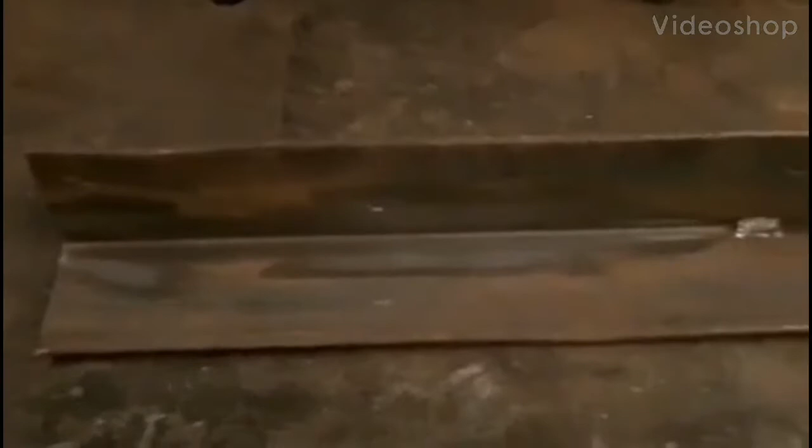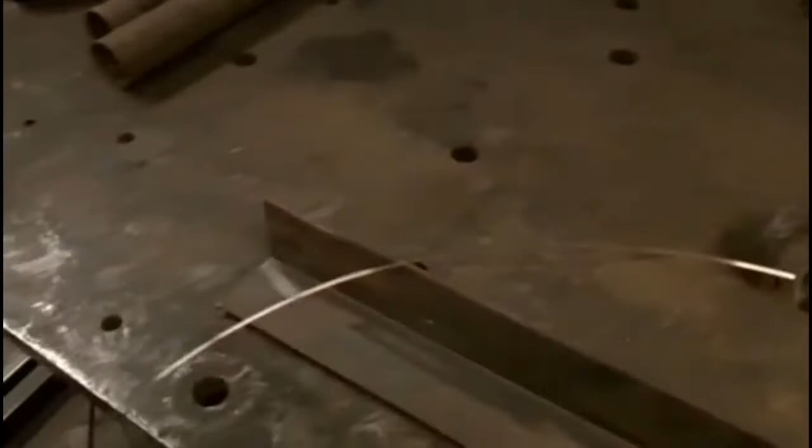We're going to demonstrate how easy it is to use a MIG welder. The way a MIG welder works is it pushes the wire out of a liner. It's controlled by a simple switch inside the machine. You pull this trigger and it basically feeds out a wire and opens the solenoid that allows the gas to come out. The gas is for shielding and protects the weld.

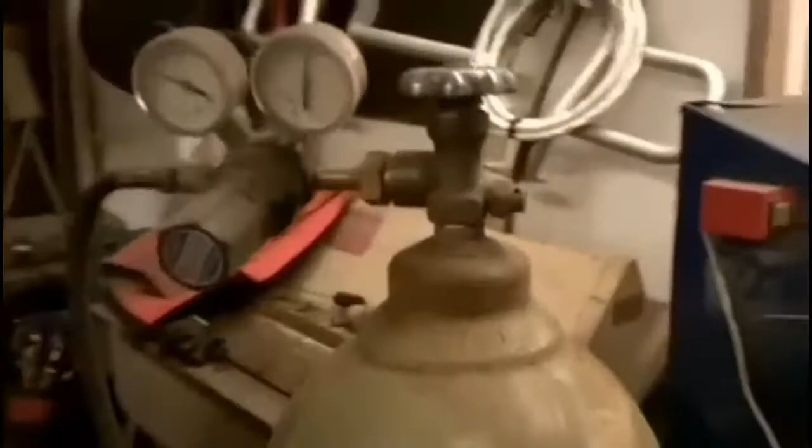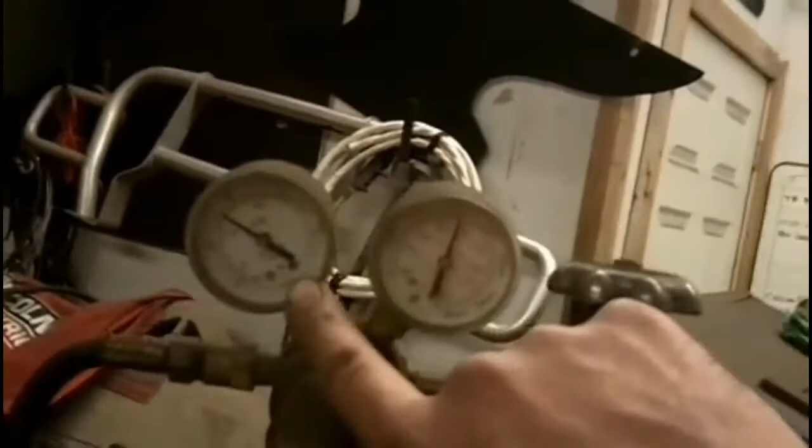Here's the shielding gas. You'll notice the regulator is set for between 20 and 30 CFH. That's your high pressure, and this is your low pressure. This is basically a kind of a flow meter. This is not really a flow meter, but this is showing you the flow rate approximately. A proper flow meter has a ball bearing that is very accurate about showing you the flow of gas.

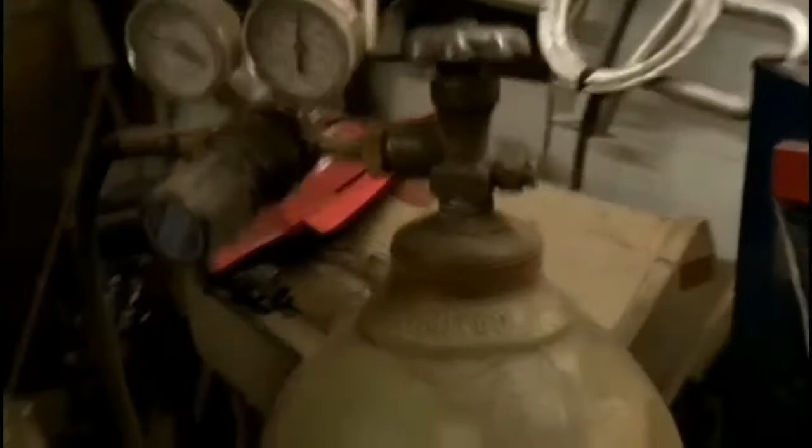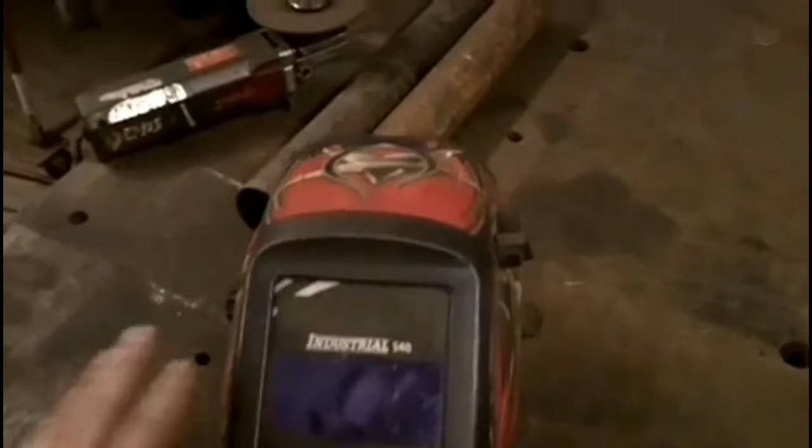Anyway, let's get some welding going on here. Just a quick thing about helmets. If you're getting into welding, get yourself a real good automatic helmet. Do not buy a cheap ass welding helmet. You're only throwing money away.

Because pretty much all of them now have a sensitivity dial. That's there for if you're working out in the sunlight or in the dark. You can change it so it triggers at the right times. Maybe you have a welder working right beside you and your helmet keeps switching when you don't want it to. That's what this is for.

This machine goes from shade 7 up to 14. Shade 10 is sort of the average for like burning 1/8 rods or welding 1/4 inch steel. If you're welding some thin sheet metal, you put her down to 7 or 8, something like that. And if you're gouging or something, you might put her up to 13. You're doing some aluminum TIG welding at 300 amps, you might put it up to 14 or more, because that shit is bright.

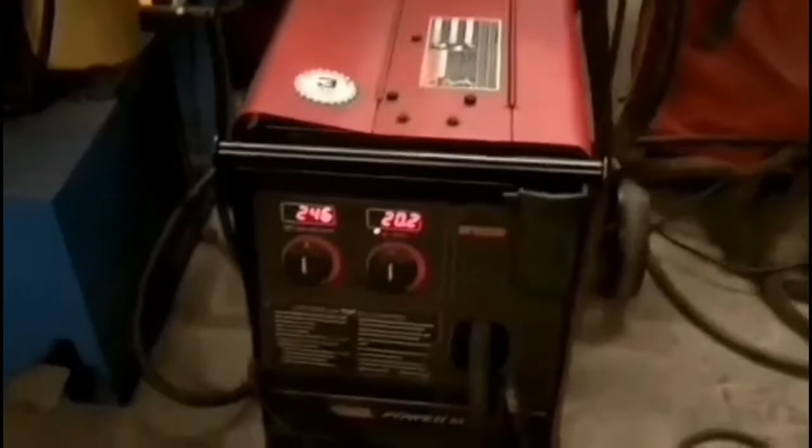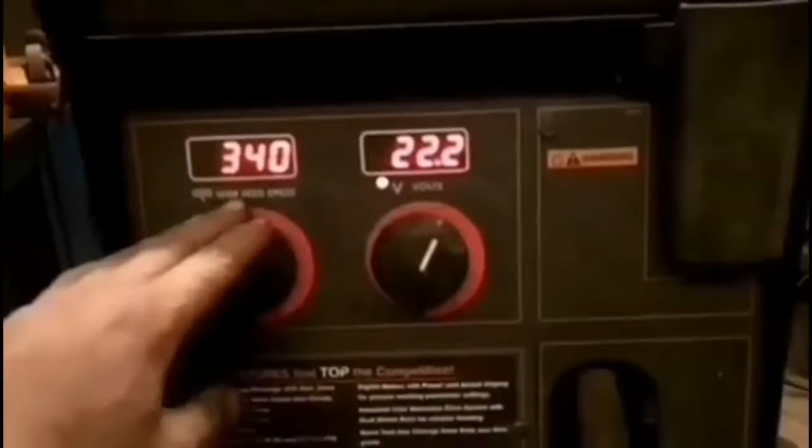All right, we're going to do a quick pass with this machine, and then we'll start to get into how to make changes with your settings. I have not changed any settings on this machine from when I fiddled with it. I've got a piece of 3/16 angle iron right here. I'm just going to weld into the middle of that, and I've got my machine set at 20.2 and 246. The numbers really don't mean a lot. It's more or less a feel thing. This is your heat, this is your fill.

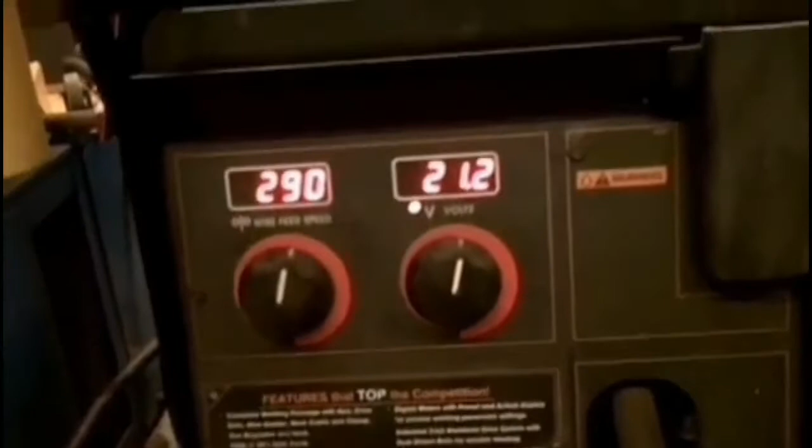If you're having a problem filling the gap but it's burning good, turn this up. If you're getting a piled up weld, turn this down. If it's too hot and it keeps melting through, turn this back a bit. If when you did that, it starts pushing back the wire, turn this down along with it. The numbers, again, you can put pieces of tape over that. They don't mean shit. It's just sort of a reference.

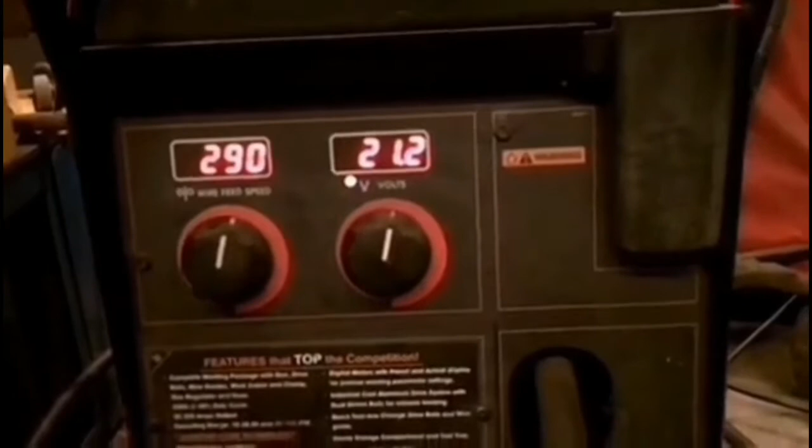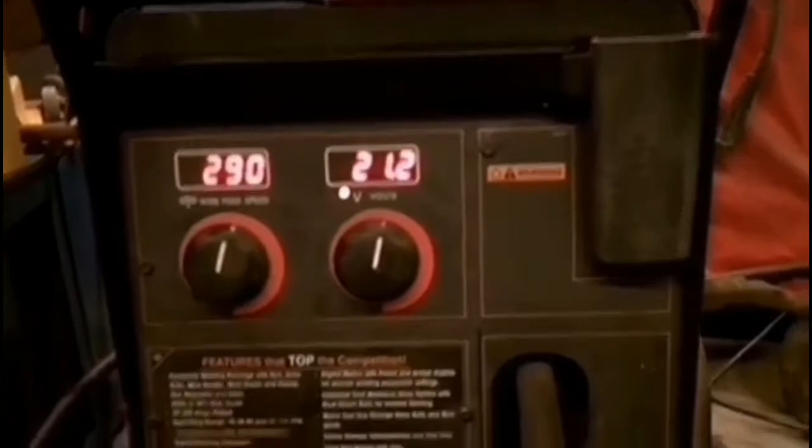The reality is you change these dials as you need to change them. Do not be afraid to change dials between every single weld. There's people who think that they can set this up and it should be doing a good job all day long, even though they're changing positions and welding up and overhead and down. The reality is you are not a good welder if you're not changing these constantly. Making a simple minor change like that just to fine-tune a little weld so you can do a better job, that differentiates a quality welder from a hack. So don't be afraid to change your dials.

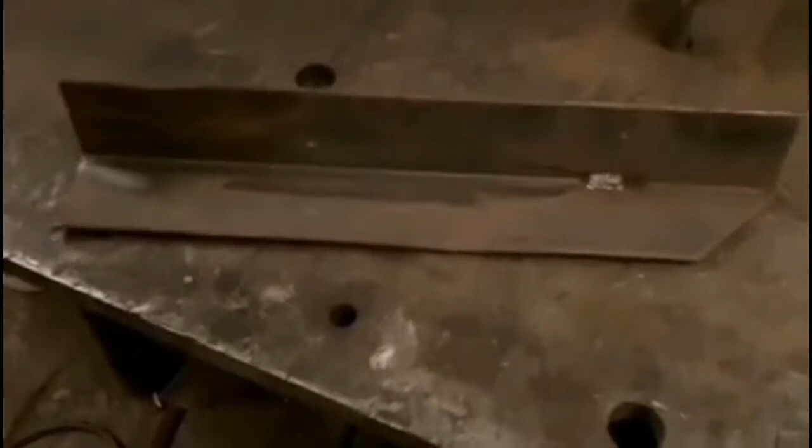So I'm just going to go with those numbers. This weld may suck, but what it's going to show you is if the weld isn't working out, then we're going to make changes to make it work out. And I'm going to show you how to make those changes. So I'm just going to quickly snip this wire off. Never burn it off; some guys will put that gun under the table and burn that off. Don't do that shit. Pros don't do that. So, do a little weld here, see what happens.

Okay, it's kind of hard to hold the camera and do this at the same time, but that weld came out more or less perfect. I can't really see too many problems except a little bit of a spatter problem. I think my wire feed was just slightly low. And what happens is you get a little bit of globular action happening there. So the voltage seemed to be pretty good. So I'm just going to make a minor change, not much of one. You see how subtle that was. And we'll try it again.

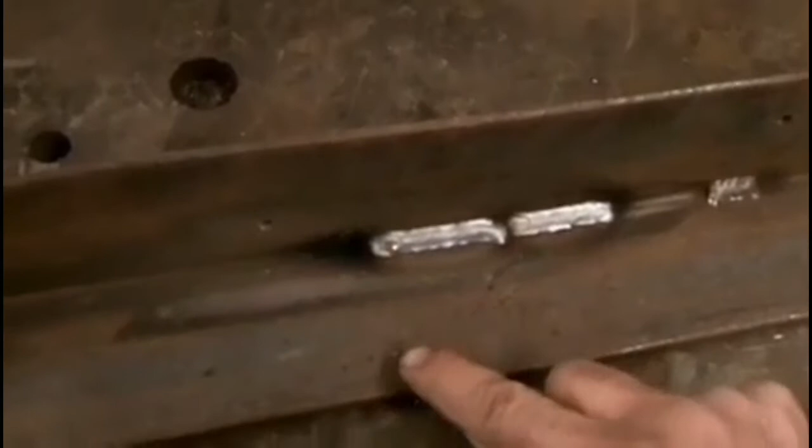Now you see how that sounded a little bit nicer? Didn't really change the appearance of the weld much, but it eliminated my spatter problem. The balls of spatter were smaller. That'll make them less likely to bond and therefore easier to clean up with a wire wheel or just by knocking them off. They're likely not welded on. I know you can't see that with the camera, but there's a couple here from the first weld that are almost a millimeter across, and they're definitely welded on. Well, not definitely welded on, but you can probably knock them off.

But I'm going to show you something else. This is sort of your typical short circuit transfer style welding. When you hear the sort of machine gun sound there, the more you dial that in, the more that sound is smooth. It's not the end all be all of how a weld should go, because I've seen people where the only way they knew how to dial in the machine was by the sound. Sound ain't important. The end result is important. What this fucking weld looks like is important.

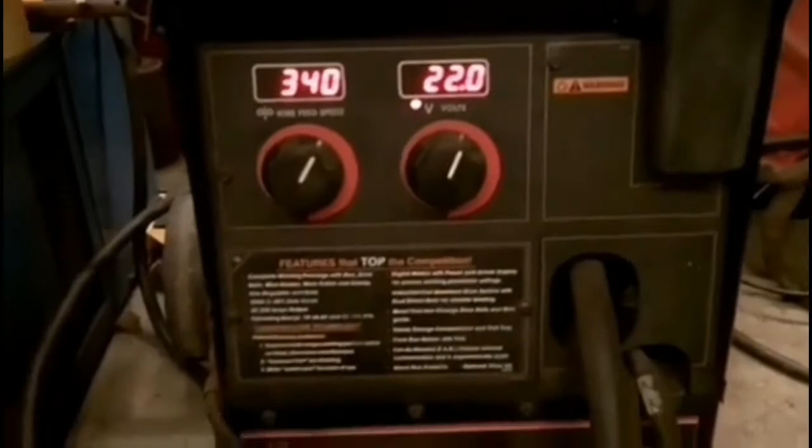And is it fused? Because you can do the most beautiful weld in the world, but if this piece is not stuck to this piece, it don't mean shit. It ain't a weld. It's not the weld itself, the end result is the weld. So I'm going to dial this up, bring this up a notch, and show you what spray arc seems like.

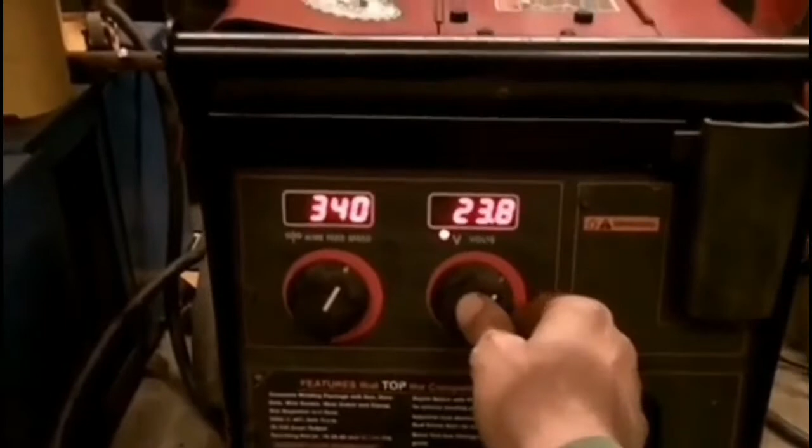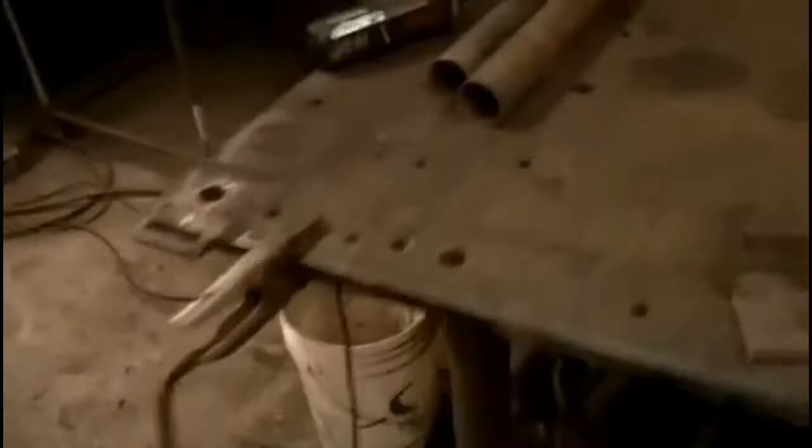The wire's a little small for spray arc, but we're going to blast these volts up to like 27 volts and about 480, 470. When you're doing spray arc, this tends to be a little bit of a lower ratio than this. They won't be lined up. We're just going to take it from there. Like I said, just set your numbers and don't worry about it. Do a practice run and test it out and see if it is right. If it's not right, make some changes.

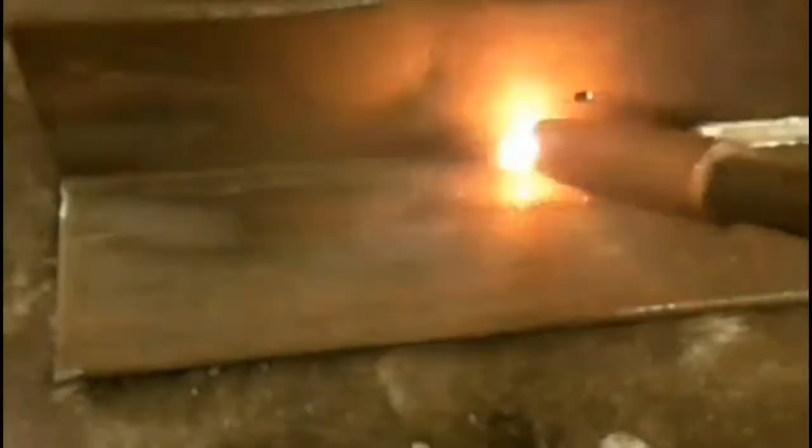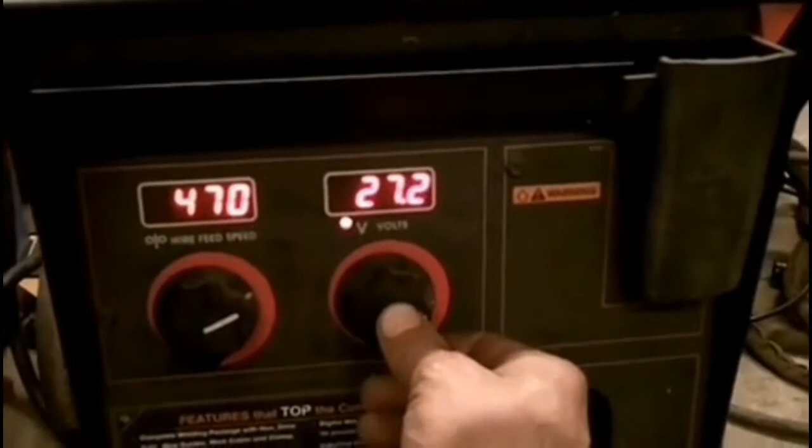Okay, that was getting close to being a spray arc weld. As it was warming up at the end there, it was achieving the visual results of a spray arc weld, which is a high degree of wetting and a herringbone pattern. At the beginning of the weld is quite a round profile, and at the end is a V-shaped profile with a line going down the center. To achieve the results we're after, we'll see if the volts go up a little more. Maybe we'll put the wire down just slightly and try it again. Try right here.

So this is the main benefit of a spray arc weld. It has a beautiful pattern. It's a very flat weld. It wets in perfectly. The downside is occasionally it's so hot it creates undercut at the top of the weld. In this case it didn't, because I didn't quite have it that hot, but if you tune it up too much, you'll get that problem. It's almost impossible to do spray arc in any other position than flat. Overhead I've seen it done, but it's not really practical. Deposit rates are too high.

The main benefit is that there is almost no cleanup. There's very little, if any, spatter. Super clean looking, super fast, super hot, digs deep. It's a great weld for heavy material; if you're going to weld something real heavy, that's the way you want to go. So you see the difference as the heat went up, right? That was much colder, a little hotter, a little hotter, a little hotter. So anyway.

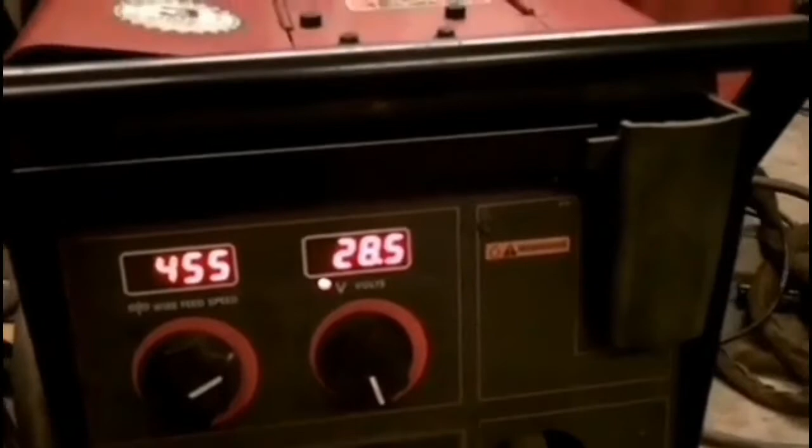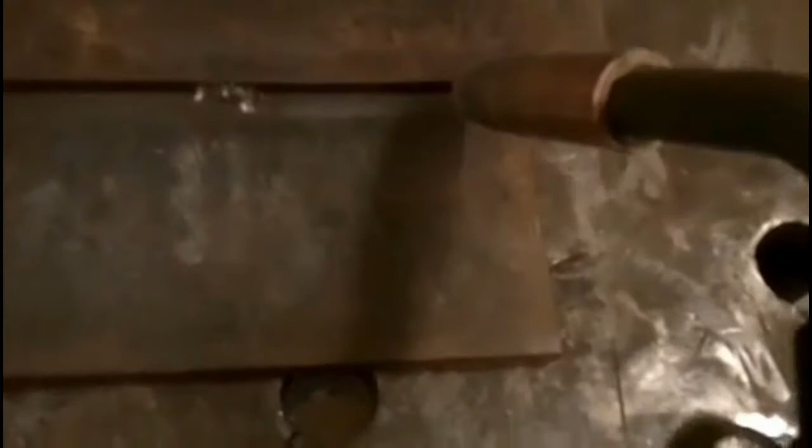So anyway, this is a piece of 1/4 inch and this is a piece of 1/2 inch, which makes it a little funny, but we're gonna tune these volts up even more. Oh, that's as far as the machine goes, 28.5. We'll just leave it at 455, and we'll do a real heavy spray arc. Ideally, it would be almost a silent spray sound, so we'll see how it goes.

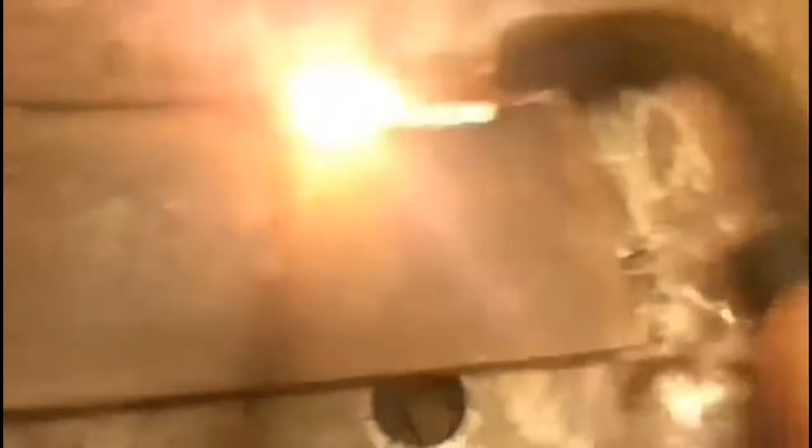Okay, that was a real hot weld. I know some people will critique my straightness there, but you try holding the camera and welding with one hand at the same time. It's not really that easy to do, but I think I did okay.

Again, I'm not getting my true spray happening, but that's because I'm running the 035 wire. If I was burning 045, it'd do a much better job, but it's not bad for what it is. Anyway, that's the basics of welding a fairly thick material with MIG welding.

Just thought I'd go over what a weld ought to look like, because if you're welding, let's say, this piece to this piece in thin material, what you need to do is make sure that when you weld this, it's hot enough to penetrate down into the weld joint. So if it's 1/8 thick, you don't bevel anything under 1/4 inch really. You just make sure you got a good enough gap.

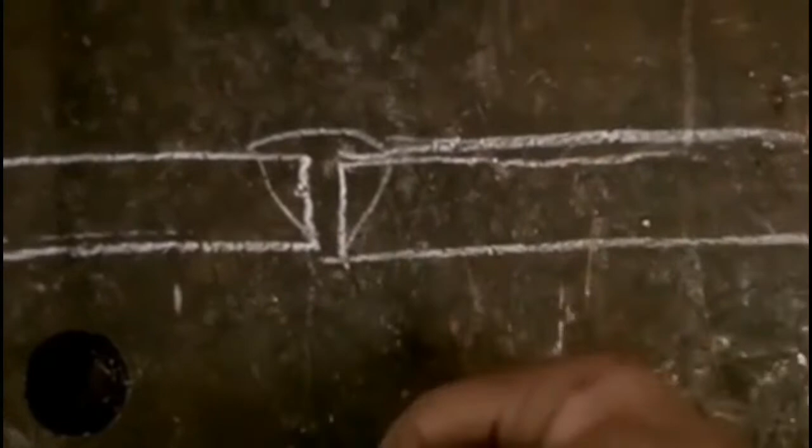Even 1/4 inch you can do it if you're good, but make sure you got the gap just right to get that one weld down in there, and you won't see much at the bottom, just a little bit there, but it's not truly a good weld unless it goes right through. It's really only half of a weld if it comes up a little bit short under there, in which case ideally you run a pass on the back just to be on the safe side.

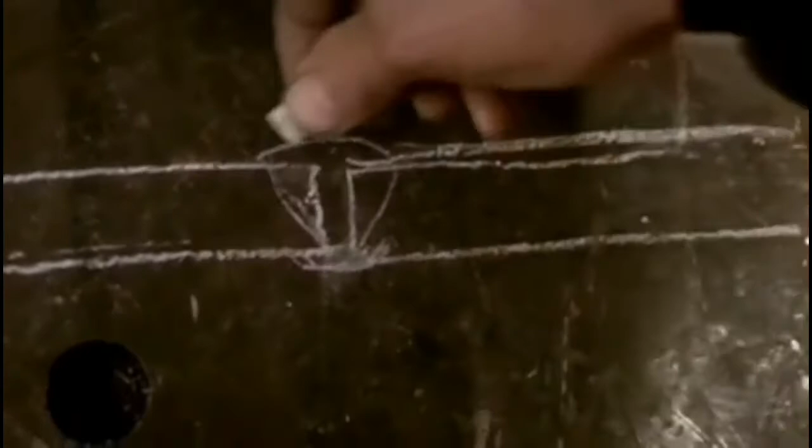This is called reinforcement, and this is called your base metal. This is your weld, obviously. When you grind a weld off, you're actually making this whole area weaker than the original. If you leave that weld, as long as it's got a great looking profile, you really should leave the weld.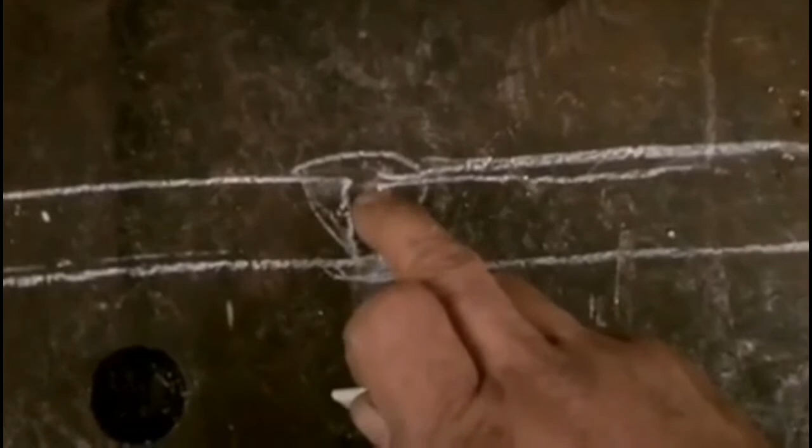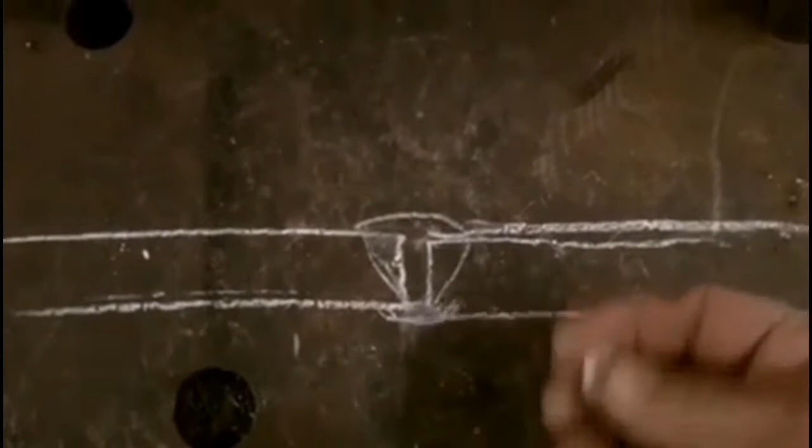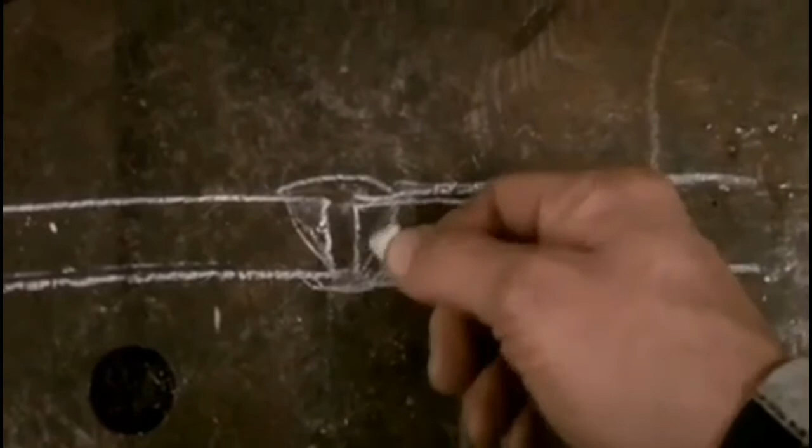That's why you quite often see welds where people don't clean them up, because if you're an amateur, you think, well, I should grind all that stuff down and make it real pretty. Well, you're doing yourself a disservice, because you're making the overall joint a little too weak. It's close to the original, but it's not 100% as strong, because you have what's called a heat affected zone all in here, where the metal has been affected by the heat. And that's pretty obvious, I guess.

So this is kind of like insurance, this extra bit of metal. So try to do a really pretty weld, and then you can leave it there and you can be proud of your weld.

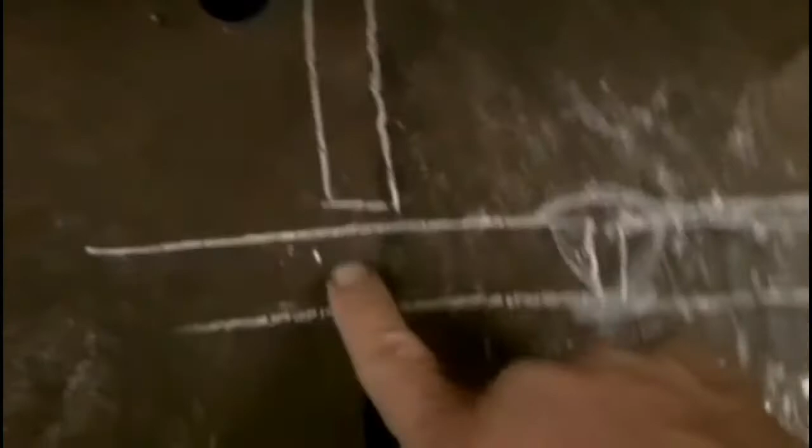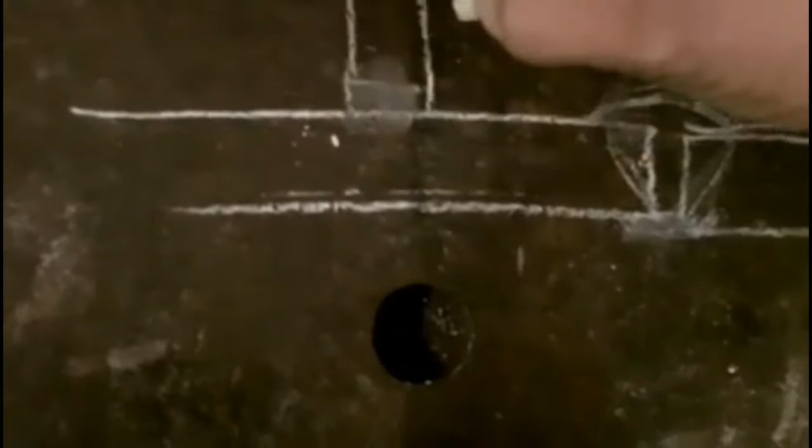So, a weld profile for a fillet joint, say you ran another piece in here. Now, in small material, it's not a problem to just butt that right up. There wouldn't be a gap. You just bang it right up against it, and you're going to do a weld here, and you're going to do a weld here. I'm just going to exaggerate what the weld should look like so you can see it a little clearer, but it wouldn't be this big. But the profile, like a cross-section look, should be like this.

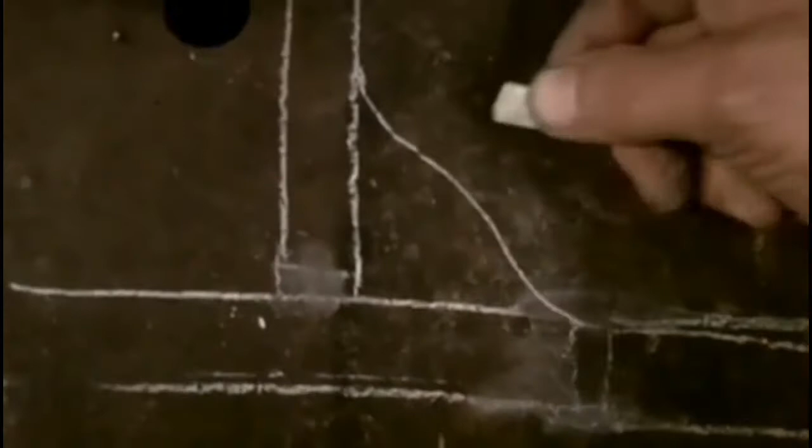Okay. It should be slightly humped up in the middle, and this is what they call wetting in, which means it's a smooth transition into the base metal. What's called undercut is when you've ran this a little too hot and it melted that away. If you've done a bit of welding as an amateur, you'll understand what undercut is. That's where you ran it pretty hot and you didn't have the angle of the gun quite right, or there's a variety of different reasons for getting undercut.

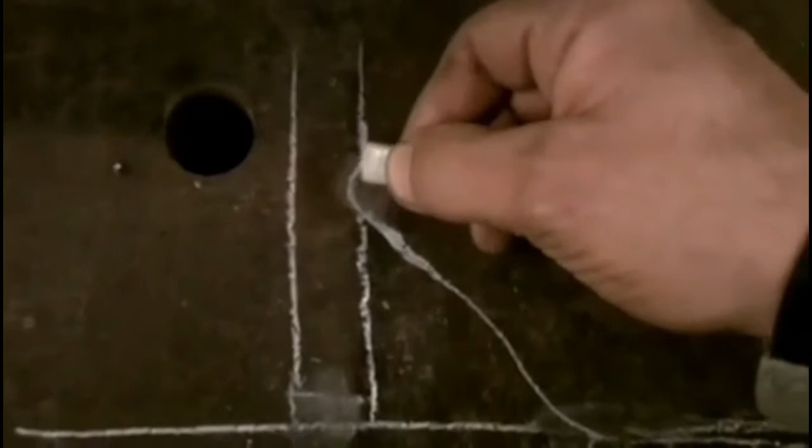But undercut is a serious problem, because let's just say this was 1/4 inch and you had a decent undercut there. Well, you just turned that 1/4 inch into 3/16. So what was the point of building the whole thing out of 1/4 inch anyway, because it's really only going to be as strong as that weakest point. So you really want to try to control undercut.

If you get undercut, the simplest way to fix it is to run another little quick pass in there. It's not going to bother anybody. You're kind of doing a little bit too much work there, but it's better than having that weak spot.

So don't do it. Set your machine right, and you know, practice. What I'm going to do right now is I'm going to show you a little bit of welding on some 1/8 square tubing, just because that was the first thing I grabbed, a piece of scrap. I turn my machine down to where that would be. Ideally, let's just put her around 19, just as a starting point.

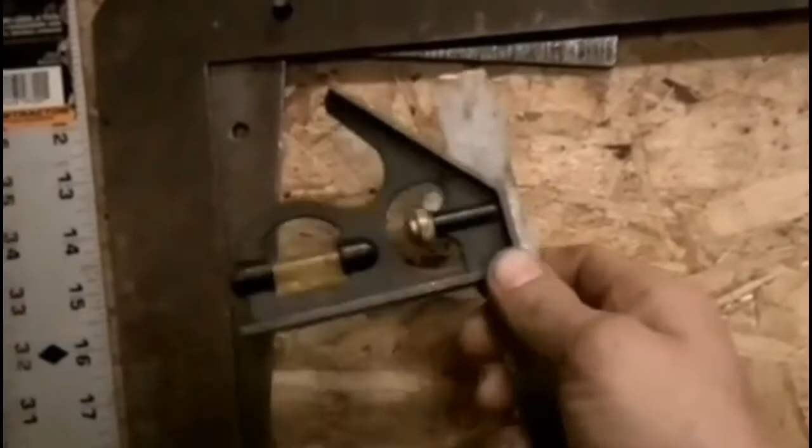What I've got here is 2 pieces of 2" by 1/8 wall square tube. So let's see, if you were actually building something and you're trying to do a nice joint like that, a good square to use, I mean, you can use pretty much any kind of square. Speed squares aren't bad. Any kind of framing square is okay. They tend to be kind of big, so big square, big project. But one thing you want to do is nip the corner off carefully. Don't add a bunch of heat to it, because you may throw your square out a little bit.

But this is for small stuff, tubing and stuff. This is sort of the general shop square that lots of people use. Tri-square is what it's called. Works good for lots of tubing and stuff, because you can put it up against the back here. Fits in smaller spaces than a speed square or a framing square. And it's used for probably 90% of the squaring work, except for larger things, larger square. So we get back to the 2" square tube that we had. Just gonna make like a T-joint.

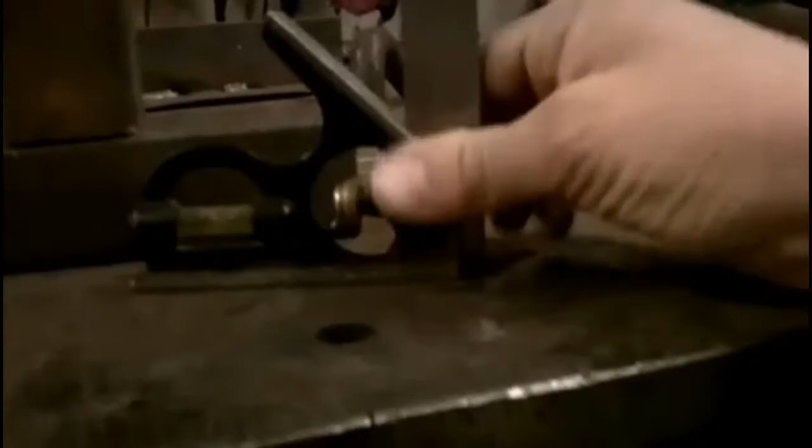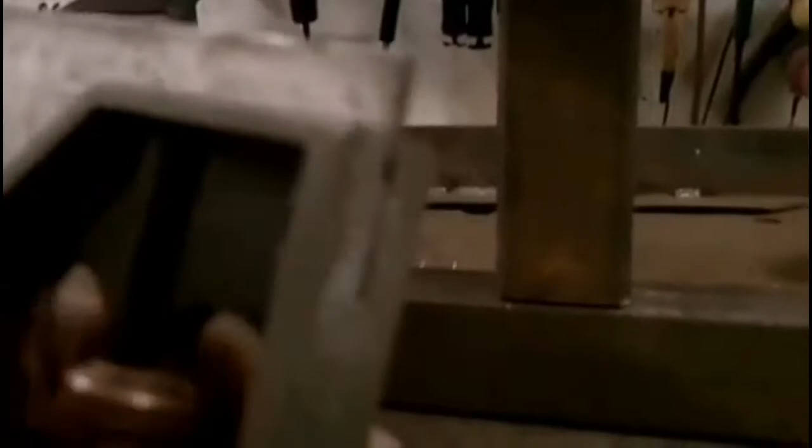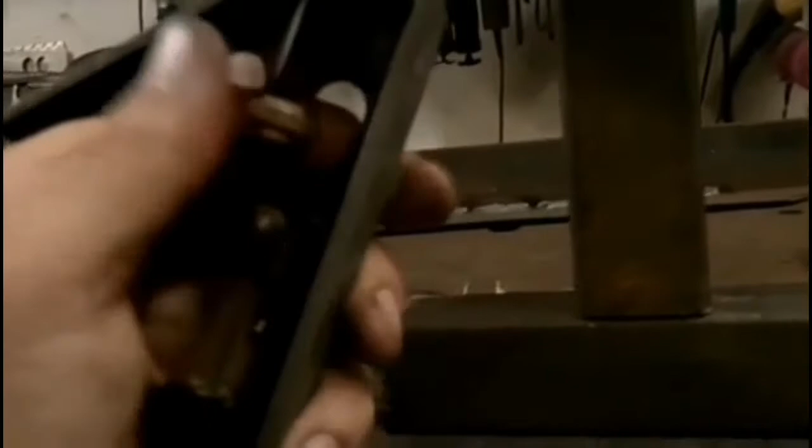So I've got that sitting there, and what I'm gonna do is I'm gonna take my tri-square, I'm gonna loosen that up, I'm gonna drop that down to the bottom. And you always want to push that bar, the ruler, back just a tiny bit beyond the surface there, just maybe a 1/16. And with a tri-square, never over tighten it. When you over tighten them, they go out of square. If you don't believe me, check it out. Just crank on them sometime and see what happens to your square. So it should just be just snug enough.

Don't cheap out on a tri-square. Make sure it's basically like a cast. I think this is a cast aluminum maybe. Don't buy a plastic one. They're not worth shit. As soon as you start doing any welding around them, they're just screwed. They'll sit on something hot and melt away. So I'm just going to put this tri-square up against that and check for square. That thing is absolutely perfectly square right now.

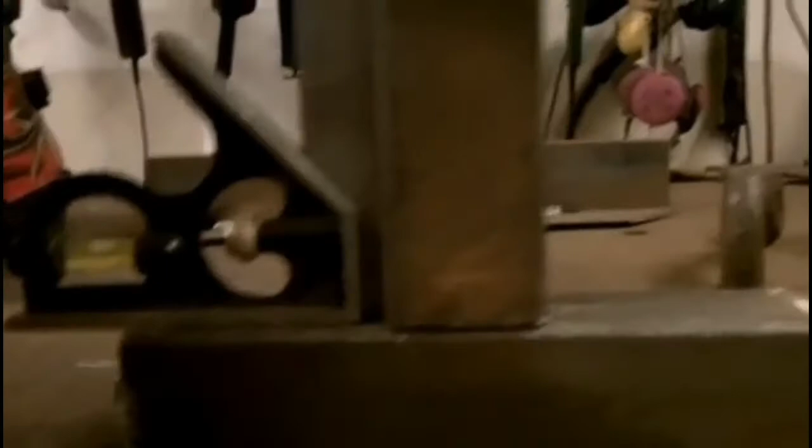Likely because this end piece was cut in my, I have one of those dry cutter saws. They're great. They cut really nice with a brand new blade. And very square, especially if you buy a good machine. Some of the cheaper Chinese machines I've used, they're not quite as accurate as mine. Mine's a Porter Cable, but you know, you get what you pay for. Twice as much money, it's going to be twice as good, hopefully. So she's dead on square on this side, so I don't have to really worry about anything. When you put a joint together like this,

another thing, I don't recommend those triangle magnets, those red welder's magnets. They're not bad, but they quite often cause a bit of problems. You got to clean them all the time because obviously they're magnetic. They're attracting every single piece of dust and spatter in your shop, and you got to make sure there's not the slightest little dingleberry under there, because they will mess you up. You're much better off just kind of going by eye, and there are moments where I've used them and they've kind of been the third hand you don't have,

and maybe I could design one to hold this damn camera. That might be a good idea, actually. I have to work on that project.

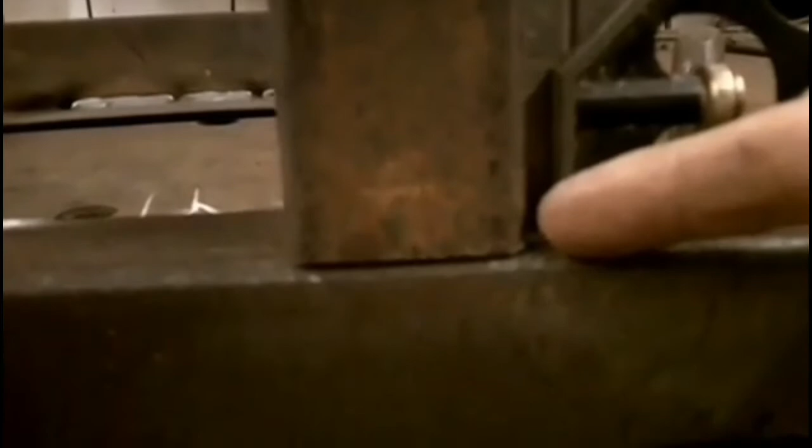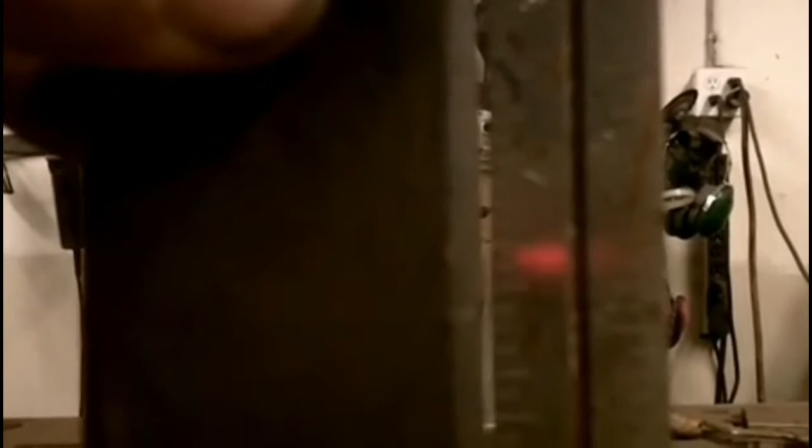So anyway, when I'm putting this stuff together, I kind of don't think about it too much. It's sort of on autopilot, but I slap my square against this here, and if it was a little out of square, like say over a foot it had maybe a 1/16 out. I guess it doesn't really matter, but if it has any out to it, if it's leaning this way, put your tack here on one corner. Never put your tack in the middle.

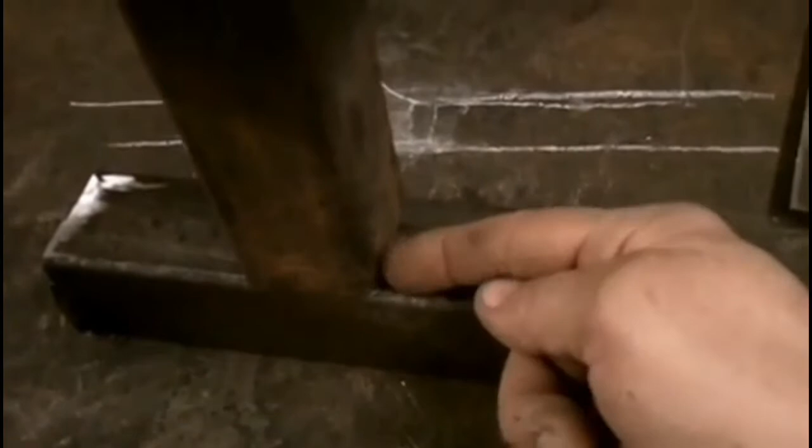Put one here and go with that one. Don't put it at the outside edge, but put it just on the inside to this side, or the other side, just depends, you know, whichever is more comfortable for you. Then what you do, likely that tack, when you put that tack there, that's gonna pull this back this way through contraction. Quite often it'll pull it right back to where you want it.

If it lines up perfectly, then you may want to push it back beyond where you were, that direction, a little bit out of square, but not nearly as much as it was before, and then put your tack on the opposite corner. And then what that does, when that one contracts, it brings it back, and 8 times out of 10, it's pretty damn close to being right on where you want it.

Then go around. If it needs to go a little more this way, do that third tack on this side first. If it needs to go that way, then do this one first, right? So, you know, you may not remember that, but that's a good trick for fabricating quickly. You can throw a joint together, a square joint, in a matter of minutes, really. Maybe even a minute, or less.

So what I'm going to do, I'm going to just show you without holding it. I'm just going to put a tack there, and we'll see what it does. See if it pulls it back out of square, which it will do. So hold on a second.

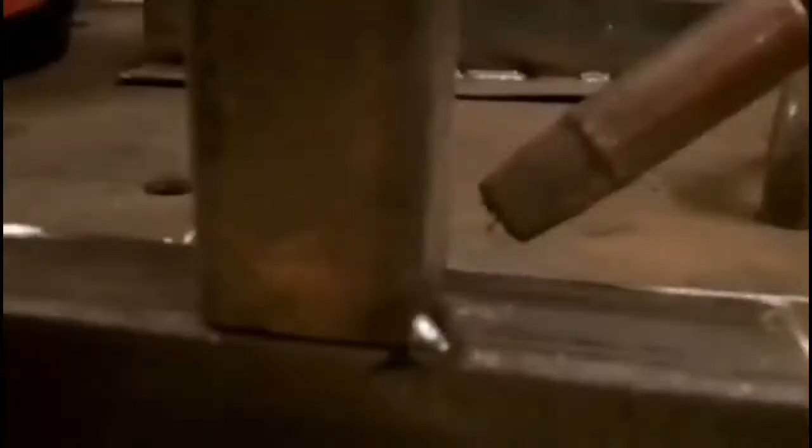What you do is put that right in 45 degrees, exactly 45 degrees, start your tack, come down a little bit with it, and then go back up beyond that a little bit, and then back to the middle again, and it'll weld. You'll see some people, when they first start doing it, they just think you hold it right in there and squeeze that trigger and wait. Well, a lot of times it'll hit the bottom a little more than the top, and it just won't be a good tack. So just rock it back and forth like that a couple times.

So we got that there. Now we're going to check this for square, and as explained earlier, it will draw. So we do have a little gap there at the bottom because it drew back a 1/16 of an inch over that 9 inches. Normally I would have held that just with my hand. When I did that tack, if I had held this with a little down pressure, it wouldn't have pulled very much. But in this case, it pulled about a 1/16.

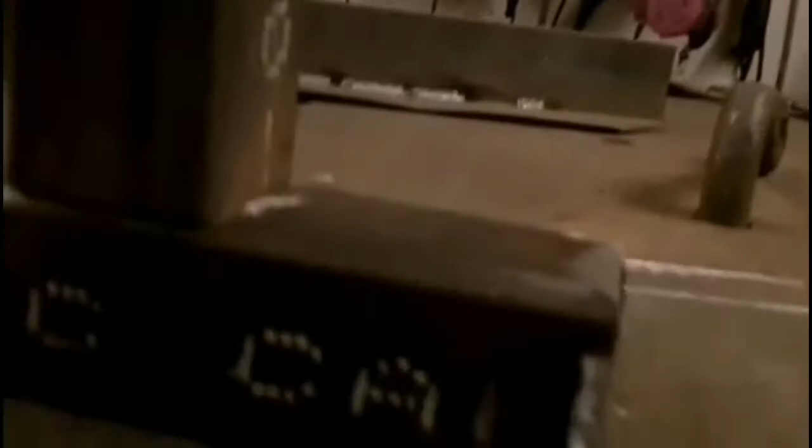So what I got to do now is when I go to the opposite corner, this corner, I'm gonna push down and back this way with my hand, and then put my other tack. So I'm gonna do that now, but I'm gonna have to set the camera down to do that because I don't have free hands. So just hang on a second. See if you can actually see this.

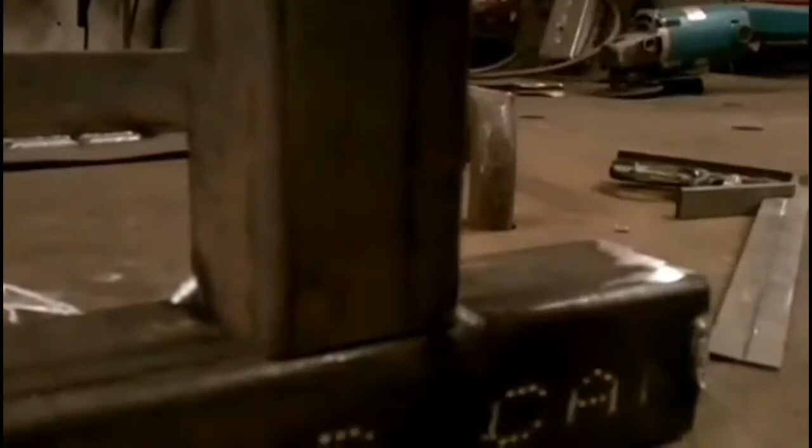Alright, I don't know if you can see that or not, I have to review the tape, but anyway, we've got a good tack there, and we'll grab our square again. She's dead on. She pulled it right back, right where you want it. Both sides are dead on square. Now, what a lot of people don't realize is you don't have to do anything else. This is good enough now. As long as these are good strong tacks, you only need those 2 tacks.

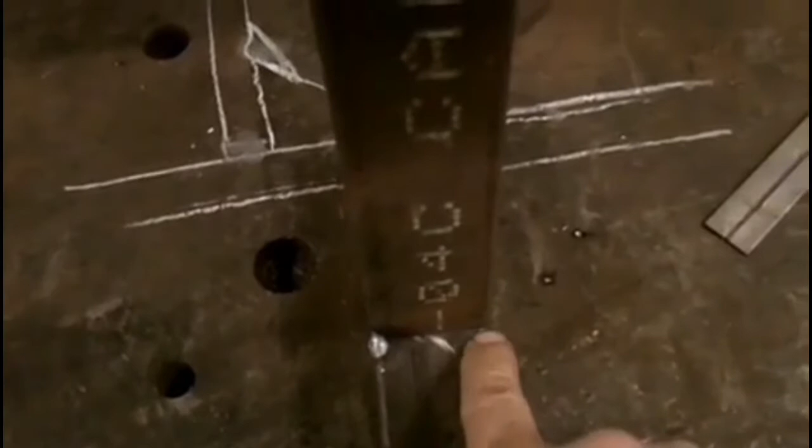Not in every case. If you want to be very, very secure about your project, then go ahead and put 4 tacks, but in some ways you're not being completely efficient. This other tack that's back here now is so strong, it really won't draw this way. So I can run this bead, then I can spin it around and run this bead.

Never start your weld on a tack. Start over here and run into that tack. It'll look cleaner and you won't have a big lump where your tack was. That's why I was saying don't put your tacks in here, because when you go to weld and you go over that tack, it's going to be a shit ass looking weld. So I'm just going to put my helmet on here and we'll weld that out. Okay, here we go.

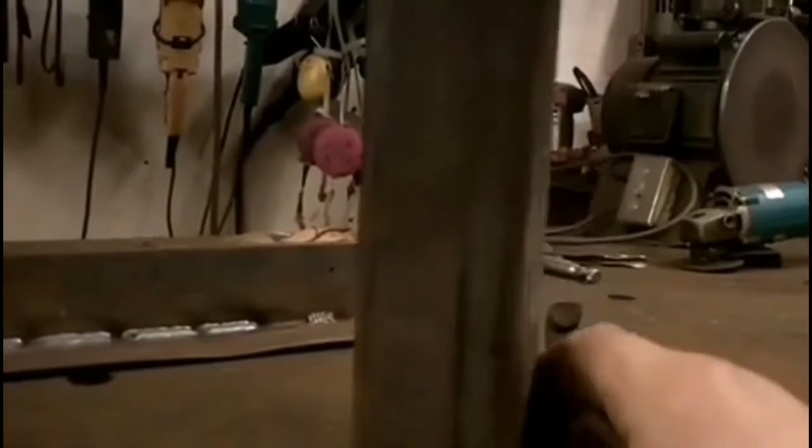Okay, so there you go. Perfect weld. Has a perfect profile, like with the hump shape in the middle that I was telling you. And we'll check the other side here for square, just to see if it drew a tiny bit. It's absolutely perfect. That weld was run, and you would think that it would draw back a little bit. On this material and this short of a weld, it won't do it if it's held by this one strong tack. That's all it takes.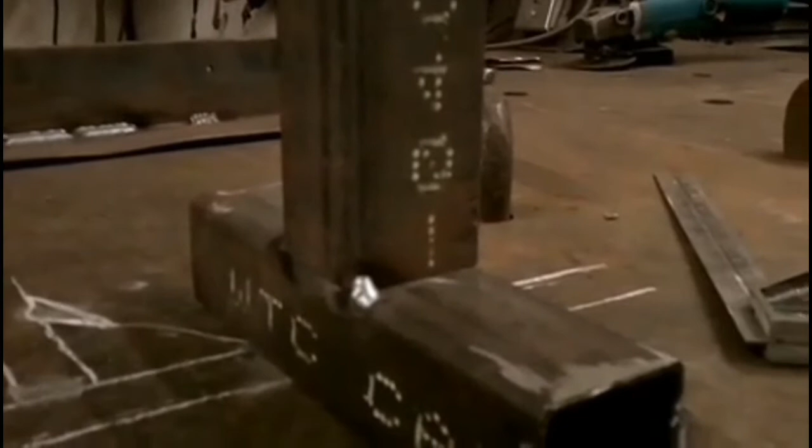Now, what I was telling you about, if you start this weld on this tack, this is under stress right now because of that other weld. If the heat hits this for a moment, it'll soften it up and then it'll draw that way. So that's why I'm saying never start your weld on a tack. Start it over, away from it. If you had 4 tacks, don't start the weld right on top of the other tack on this side. Just go in a little bit and keep the strength there.

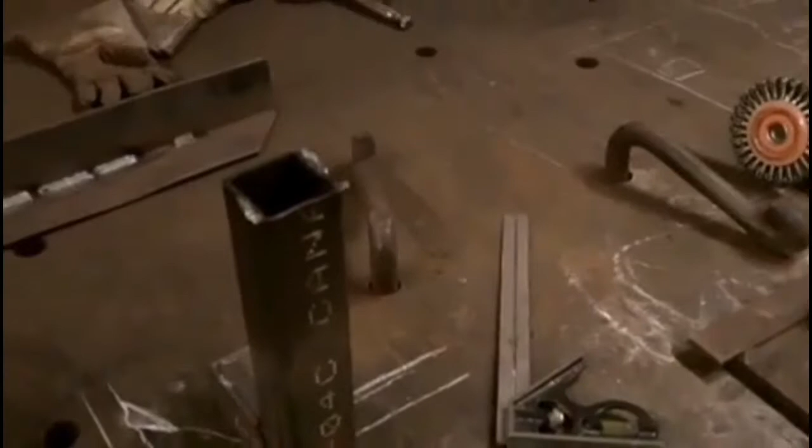So we'll just weld this other side, get it finished. Exactly the same as the other one. The numbers seem to be pretty good. It was a pretty good guess. Sometimes you get lucky, but those numbers are perfect for this material. So let's just go ahead and weld this out.

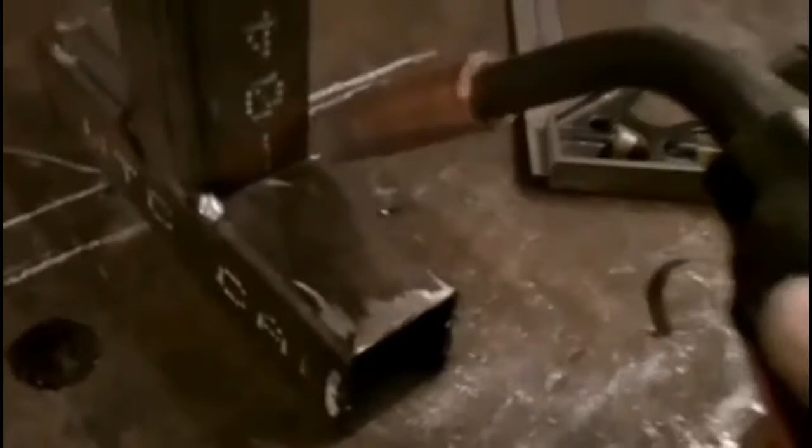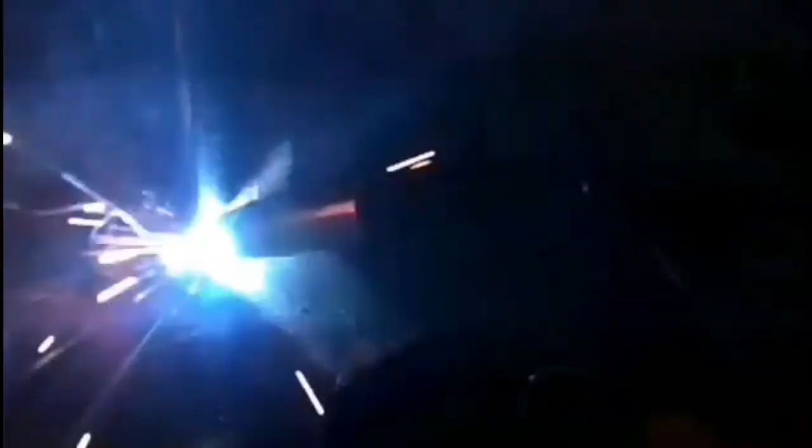It's a good habit to get into that when you finish a weld, any kind of gas shielded weld, when you stop, keep the nozzle there just for a split second. Allow that weld to cool. There'll be a little bit of inert gas just kind of falling out of the gun, and that will protect that weld just for a split second. It'll stop contamination of the crater.

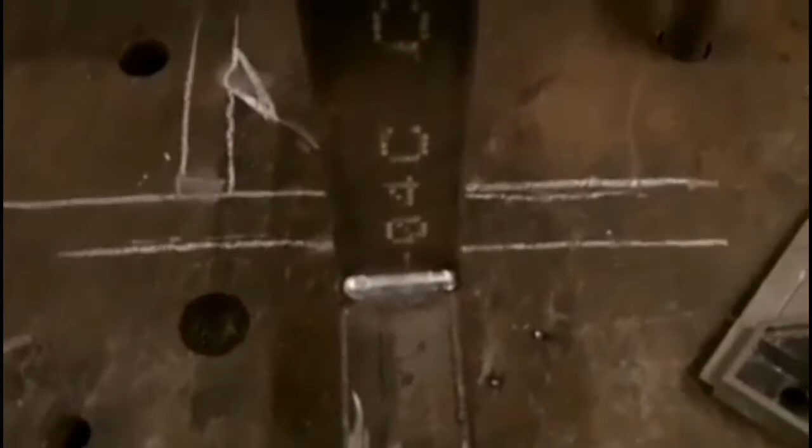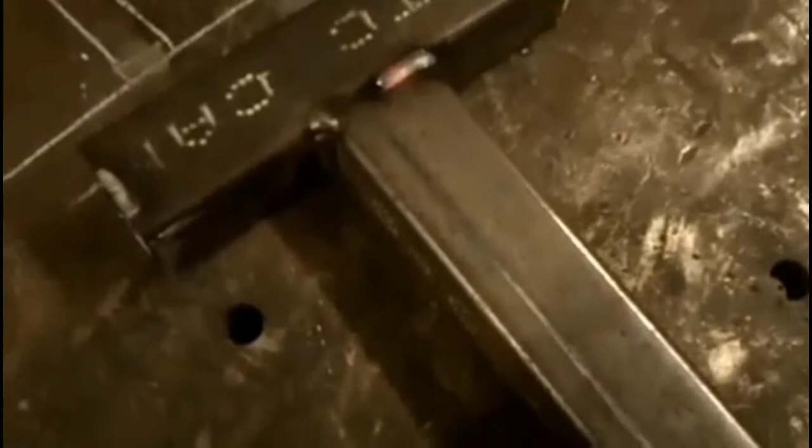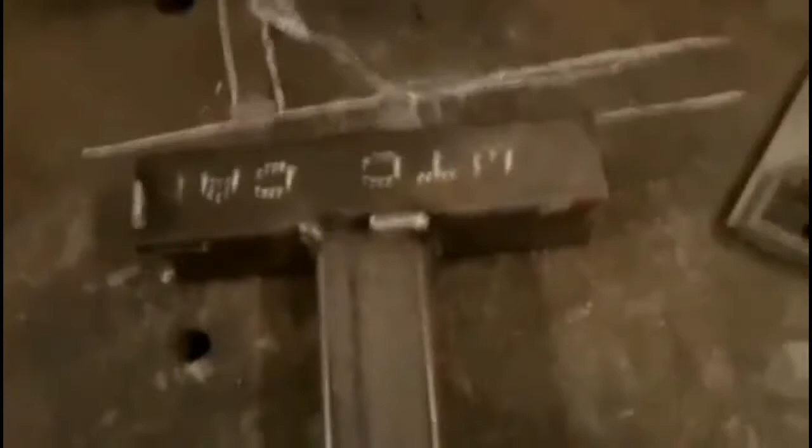So we have a decent weld there as well, and now we're going to turn this sideways. We're going to weld our flat. I'll weld it first and then I'll explain some things about it. Well, the irony of that was I just ran out of wire. I knew from a previous video when I was looking inside the machine that I was about to run out. So anyway, you really don't need to see it to understand it. But what I was going to explain kind of popped into my head.

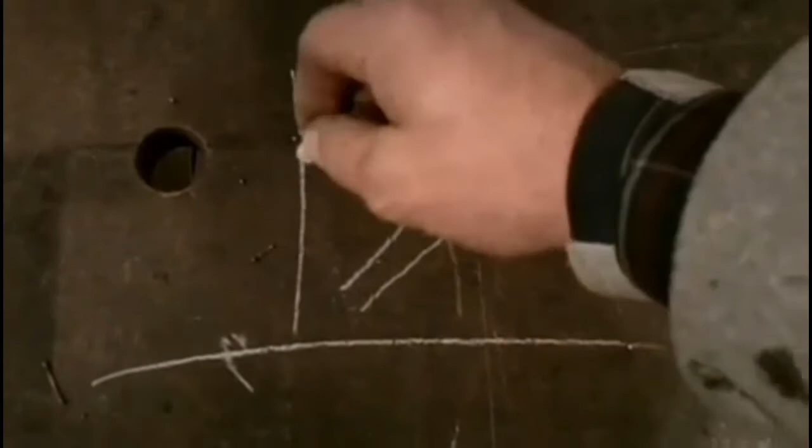When you're doing any kind of weld, let's say it's a fillet weld, the gun as a starting point should always be 45 degrees, right? So if this is a 90-degree joint, this should be 45 degrees. When you're doing this flat joint that I was doing before the wire ran out, if you were to look at it sideways, you would have noticed that I hold the gun so it's straight down. It's completely perpendicular to this weld. It's not like because I'm way over here on the side of the bench that I'm gonna reach out and have the gun running this weld like that.

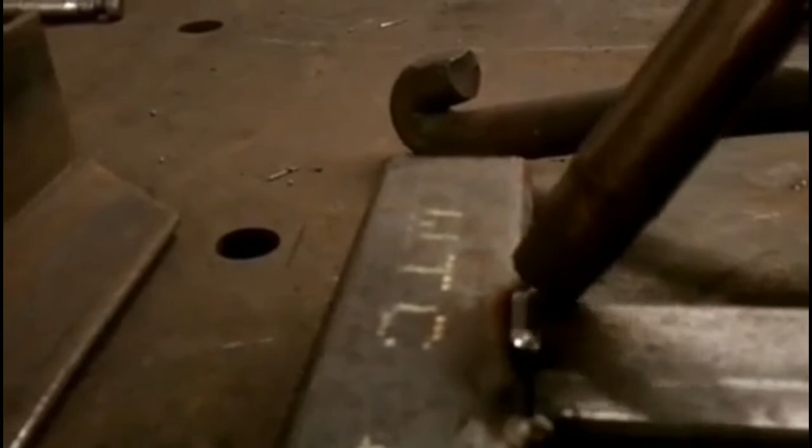Big no-no. What you're going to end up causing is lots of spatter. You may weld for years and not even understand why you created all that spatter so many times. And if you run that gun straight in there, you will minimize spatter like you wouldn't believe. Same thing as the 45-degree thing there. It minimizes spatter, but on a fillet, it's kind of important to eliminate undercut. If this was a vertical and you're welding a little too much like this, you'll get undercut because the heat's a little too excessive from the arc and it causes this to melt out. It can be caused by many different reasons, but that's one of the most common reasons. Or basically you just got way too much heat.

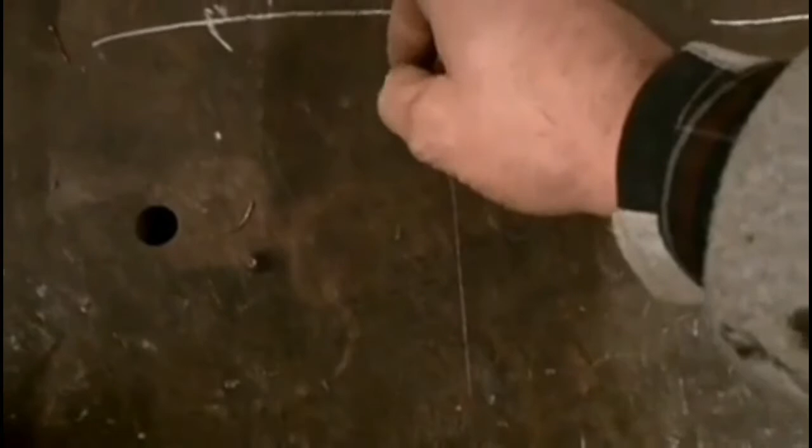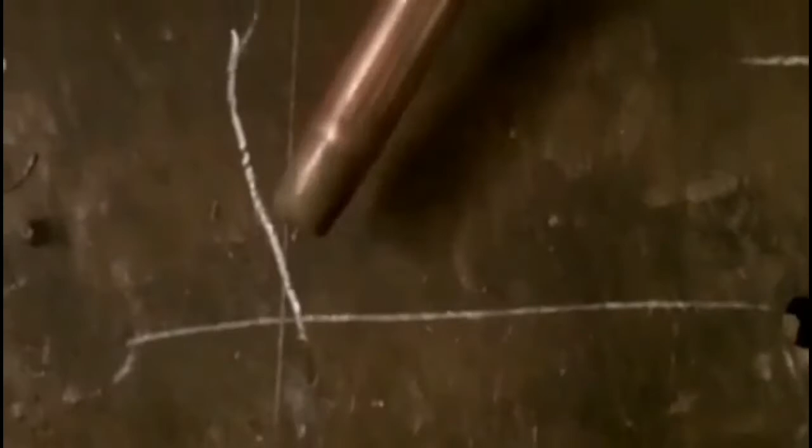So say you're welding a pipe joint, and there's lots of different angles when you're welding a pipe joint, it may be like that, and all sorts of weird shapes. Just remember that you just take this angle right here and split it in half, and that's where that gun should be, the halfway point. So if it was 60 degrees, then this would be 30. If this was 100 degrees, then this should be 50. Once you get used to doing that all the time, you'll definitely create much nicer welds.

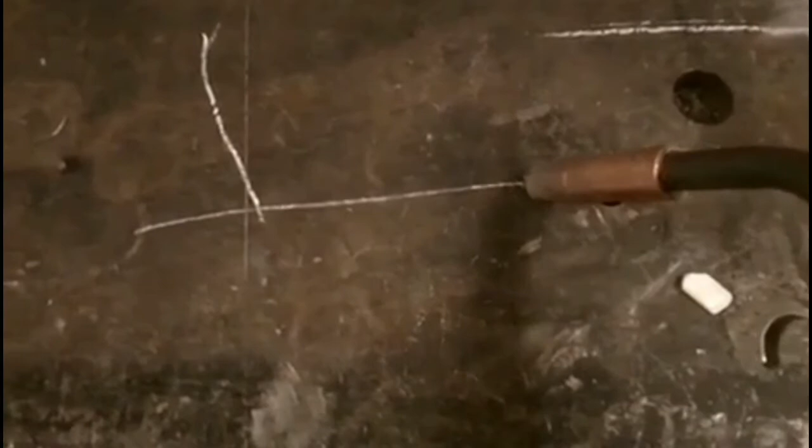A herky-jerky kind of fashion, like welding a little and then moving forward, welding a little, moving forward. You need to be consistent with your pace across. You should pretend you're a robot for a change, and maintain that travel speed. It can't be up and down. It's got to be very steady, and that will create a beautiful weld, more so than anything. But it's not the only one.